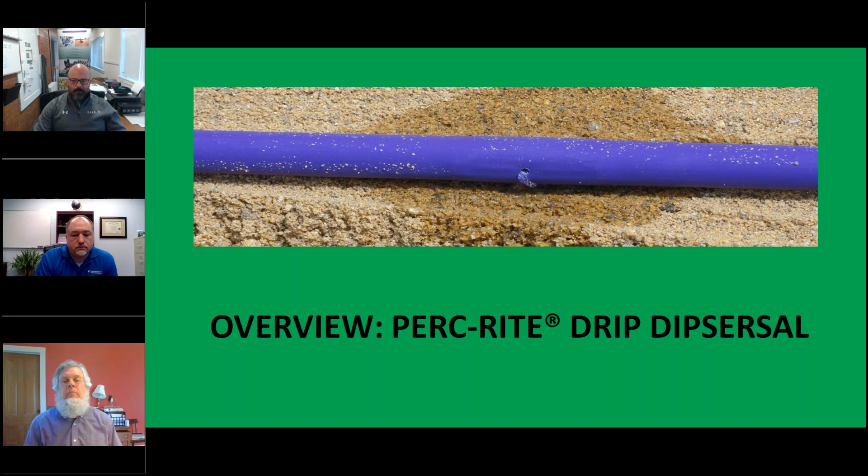So Perc-Rite is equivalent to pressure distribution under all the state codes, both large and small flows in New England. So it is a pumping system no matter what. So even if your disposal area is down gradient from your equipment, we're still pumping, okay? But need not worry, Oakson will provide sizing and actually source the pumps for you and your clients. So all the aspects we talk about today, we are providing the equipment and also the sizing for that equipment.

So what may be either the first or second most important aspect of a Perc-Rite system is the hydraulic unit. The hydraulic unit is placed in between the pumps and the disposal field. The hydraulic unit is basically final filtration. It provides a flow monitoring component. So each of these units will have a flow meter, a totalizing flow meter as part of the package.

And then lastly, we have the ability to have zones. So sometimes the zones are built into this unit. Sometimes they might be just downstream of this unit, but we break up the effluent disposal into different areas called zones. So here's some examples.

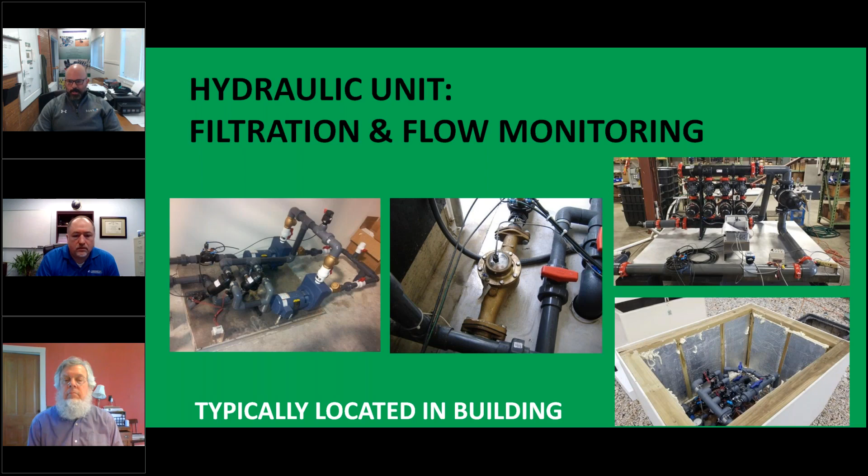So our control panel, it's a control panel, right? But we have a time dosing control panel. So when a float goes up, it doesn't mean the pump's going to necessarily go on. A float goes up and starts a timer, and we're going to dose the disposal zones on a timer basis. For these large commercial systems, it's going to be a duplex setup.

There's touchscreen displays. We have the ability to get in and out of the PLC, so we can dial in or log in through a network and see what's going on, make adjustments if necessary. Also, the ability for the panel to call out or send information out. There are data export features. So if you want to download reports on a weekly or monthly basis, that's always available for our panels.

There is a customizable aspect. So if you need different nuances or different things for them to do, our great folks at American Manufacturing can make that happen for you. They are SCADA compatible. So whether existing SCADA systems inside the treatment facility, or maybe you need something independent that we can provide to you.

And then sometimes, but not all the time, there is the ability to integrate with the treatment system, whether it be dose cutoff capabilities, killing lift stations, or even control a small scale treatment system, we can do that. So that's some of the parts of the control panel.

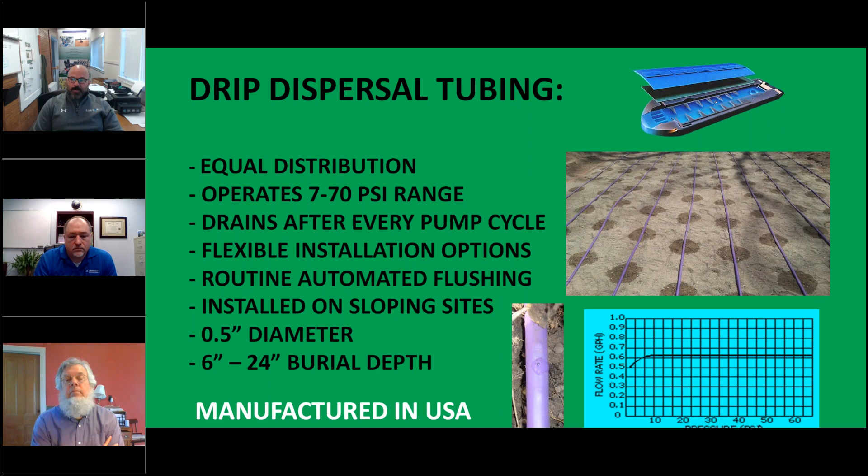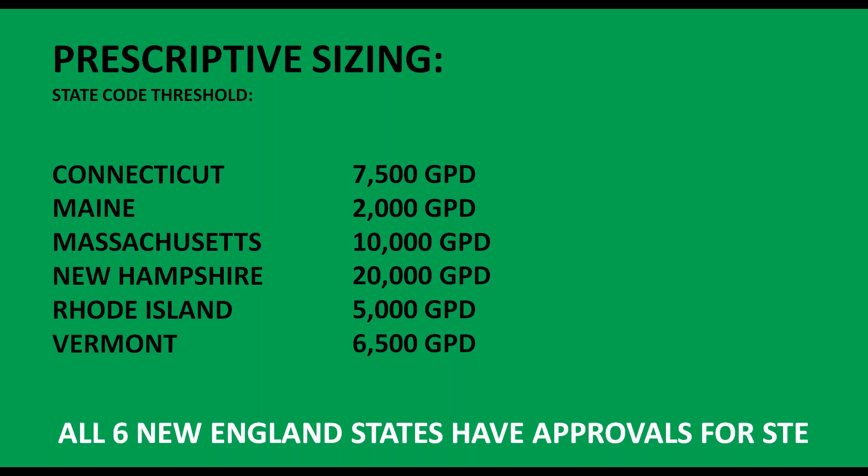But what's really important about that, all 6 New England states have given Perc-Rite drip dispersal, and Perc-Rite only of any drip dispersal technology available, approval. We're the only ones that allow primary effluent discharge through drip dispersal tubing. So we're the only one. So under this number, the state is going to give us a loading rate, but we can discharge primary effluent. Now, stating that, we're going to head into our first case study to show some of these points.

Couper Farm, Littleton, Massachusetts, a 9,900 gallon per day system. That's 100 gallons below that state threshold in Massachusetts. It is a new construction residential subdivision. The original disposal system was a stone trench system. Okay, so they started with a different idea and then transitioned. It's primary effluent discharge, no aerobic treatment at all. It was constructed in 2018.

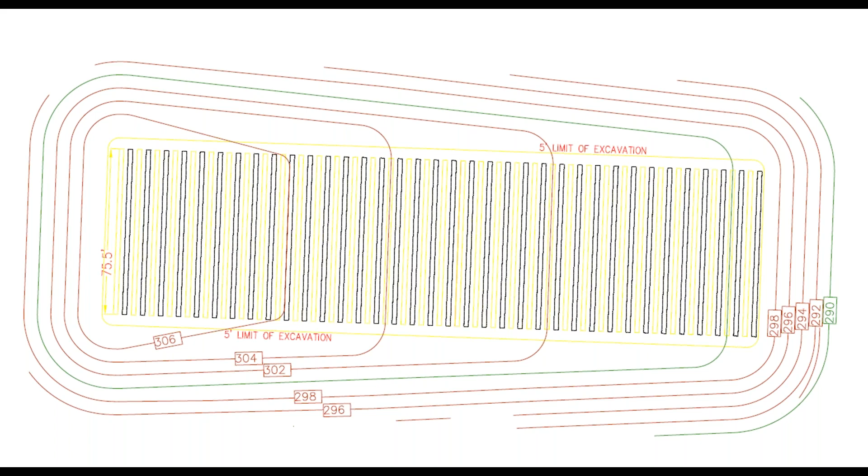So the developer looked at this and said, that's a ton of fill. You know, that's going to push back my foundations, all this grading, whatnot. We need to try something else. So the engineer came to Oakson, and we provided them a zone layout of 4 zones here that were significantly lower and had less of a footprint.

Now, these are skewed a little bit from the original trench design because we're following the contour. So the tubing runs parallel with the contour to best achieve the minimalized impact. You can see some of the grade differences. You have 306 crossing with 298, so we're 8 feet lower, not to mention a significant percentage smaller. So they decided to go with Perc-Rite drip dispersal.

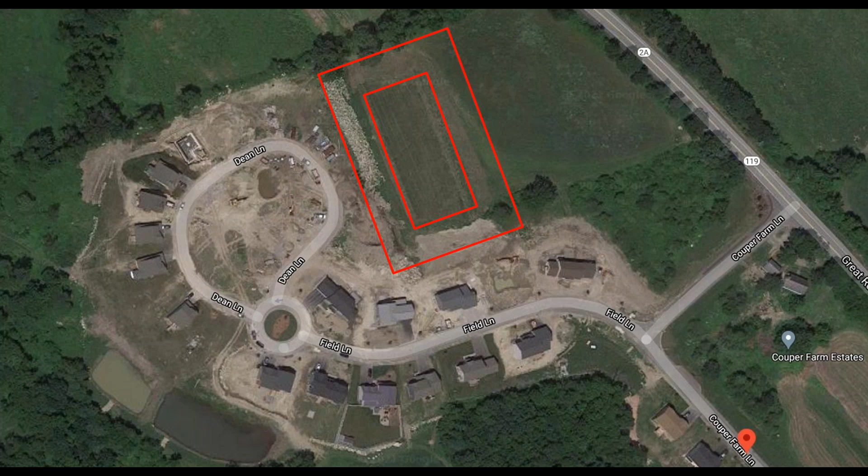So this is a Google Earth image of the site being built. The inner rectangle is the actual disposal field built. So that's the Perc-Rite system in action. The outer box would represent the sizing and area of impact if they maintained the trench system. Now, it's not 3-dimensional. It would stick up a lot higher like a mountain, but you can see the difference here.

So what were some of the advantages gained by the developer by choosing Perc-Rite? They used 8,100 less cubic yards of select sand. Originally, they needed a 5-horse, 3-phase pump to discharge. It was reduced down to a single phase 1 horsepower pump. They were able to eliminate a lift station because of Perc-Rite. Significantly less time for the installation. And our finished height was reduced by 4.5 to 8 feet over that area.

The developer provided me information stating that conservatively, he saved $175,000 in just material, not even factoring in the savings in time. And that's only for a 9,900 gallon per day system.

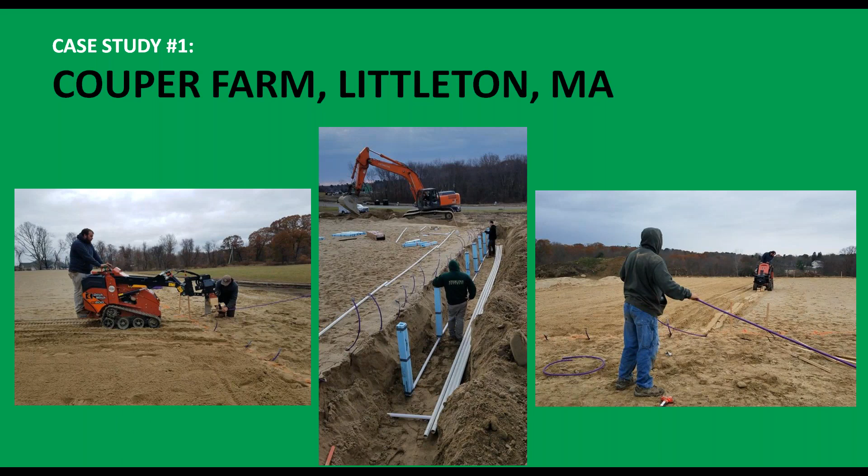So this system at only 9,900 gallons per day did not require a building, a shed, none the like. All you see is that small enclosure, one box at grade, and then a control panel. So it blends very nicely into some of these higher end residential developments.

So Perc-Rite just under the number. So meaning when you're just under that state threshold, and that typically falls in systems at 5 to 15,000 gallons per day, you can achieve the following: primary effluent discharge, so no treatment. So that would be cost savings for your client. Typically, pressure distribution is required anyway under all our state codes in the region. So you can just slide Perc-Rite right in and meet that requirement.

There is no effluent sampling for Perc-Rite. Perhaps there may be some monitoring well stuff required for your permit that's outside of the scope of Perc-Rite, but essentially no effluent sampling. There's less frequent O&M requirements, and we'll talk about that in more detail later in the presentation. All of the equipment is exterior rated, no building. Very simplified permitting process. We're under the state code and we have approvals in all states. Significant cost savings for the clients.

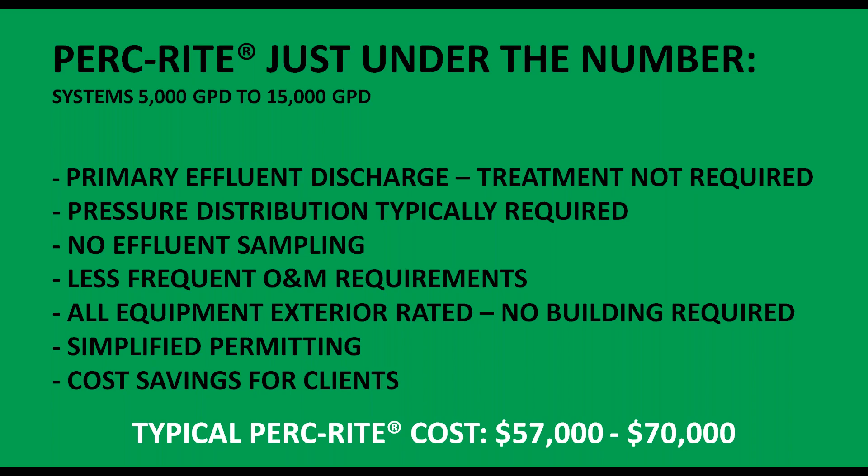Now, I haven't really done this at previous presentations, but let me put a number on this for you folks. So when we're dealing with Perc-Rite systems between 5 and 15,000 gallons per day, all of our components and our time on site is going to average between $57,000 and $70,000. That includes the pumps, the controls, the hydraulic unit, Oakson support that we'll go through later. So a very small number as compared to what you saw for the savings.

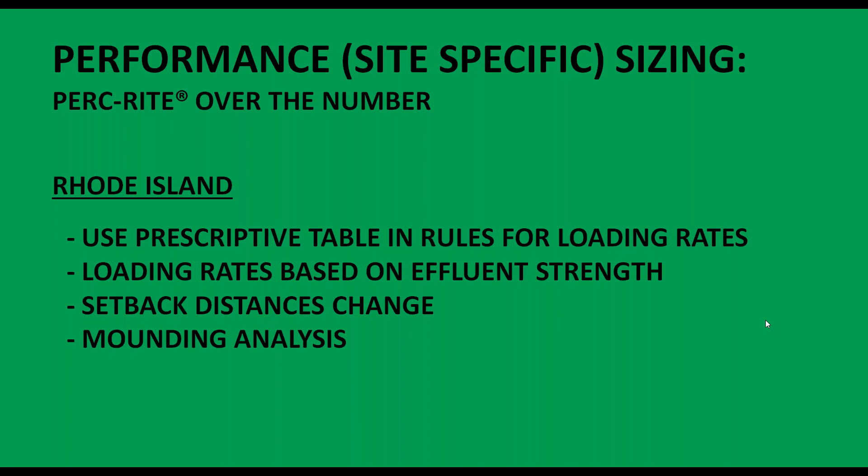In Rhode Island, you're going to use the prescriptive table for the smaller flow systems, carry it all the way up through what you need. The one difference here is that the loading rates are based on effluent strength. You also have changes in your setback distances as you increase your gallons per day. And then you'll have a mounding analysis requirement for over that threshold.

Massachusetts and Vermont have a very similar type of situation where they provide a guidance document for large system design, and they give you a loading rate based on certain types, classes of soils. So they'll make a recommendation, but that doesn't mean that you as an engineer or soil scientist, hydrogeologist, can't provide your own documentation and recommend a different loading rate. So we've seen many Perc-Rite projects in both of these states where that has been applied. And similarly, you'll need a mounding analysis, that site transmission analysis as well.

So, stating that, let's go into 2 case studies kind of wrapped into one, and we're going to transition into a different voice here for the presentation. So case study number 2, Bromley Mountain Ski Resort in Peru, Vermont. It is an 80,000 gallon per day project. It's considered a residential application, so the mountain is building additional ski housing for some of their customers.

In order to achieve this permit, we needed to provide a pilot study to show phosphorus removal, and we'll go into that detail more. All of the tubing for 80,000 gallons per day is to be plowed into existing grade. There's going to be no select fill requirement here. So imagine that. There's going to be phased in treatment. So ultimately, we need to provide tertiary treatment for this facility.

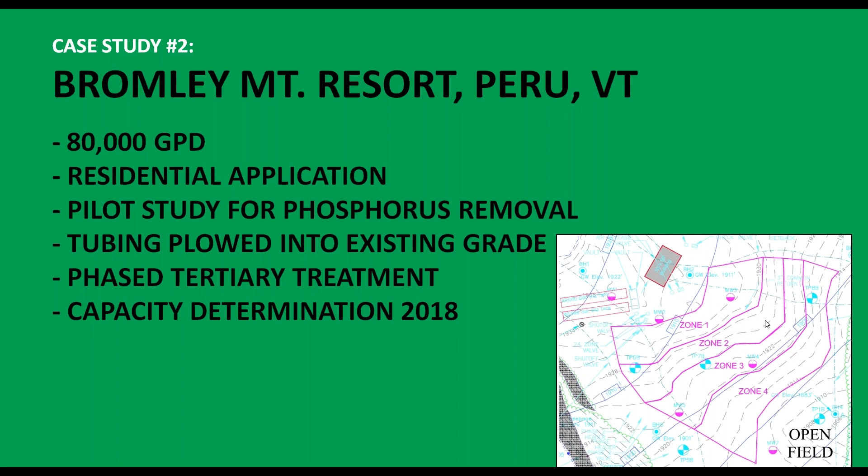The second case study we're going to be looking at during this next segment is the town of Bridgton, Maine. It's a municipal project of daily average flows of about 116,000 gallons per day. There was a hydraulic capacity loading rate determination, so the state wanted the design team to provide a recommendation for what the loading rate is, and we're going to see that whole process in detail later on. It's only a secondary effluent requirement. Construction has already commenced as far as clearing and whatnot. The Perc-Rite system is fully fabricated, ready for shipment to the site, and construction is going to begin this summer.

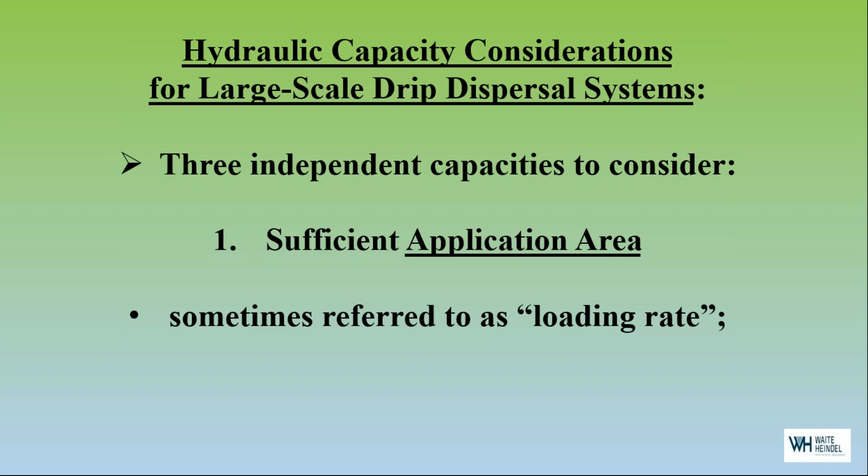The second capacity that needs consideration is the height of the induced groundwater mound. This is the mounding analysis. And the reason that's really important is that the application of wastewater to the site must not allow the water table to rise high enough so that the distribution pipes, the drip pipes, are in saturated soil. They're not going to work in saturated soil. You're not going to meet code requirements. This would be true for conventional pipe and stone systems also. So there needs to be a freeboard of some distance below the drip pipes that stays unsaturated. So that's the second capacity that needs to be determined.

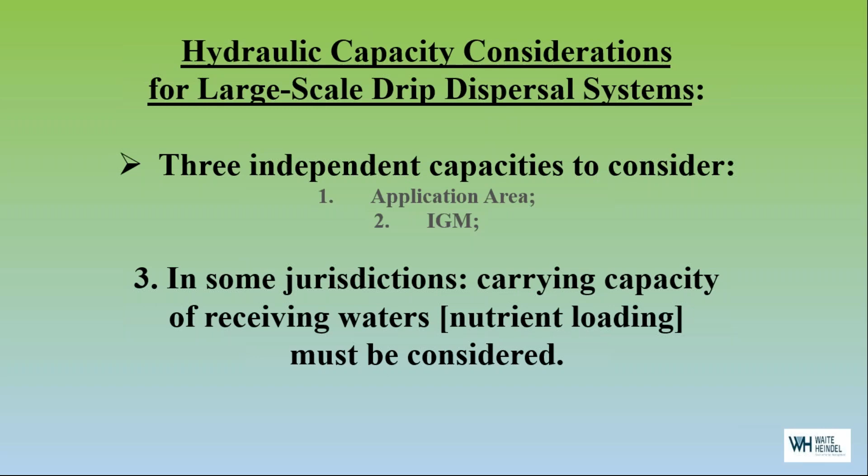And then in some jurisdictions, there's a nutrient loading question that needs to be addressed, sometimes called the carrying capacity of the receiving water. These large systems are essentially indirect discharges to surface waters. In New England, we all know that the groundwater flows towards surface water generally, and it becomes an indirect discharge to that surface water. A recent Supreme Court decision, the Maui decision, has confirmed that it's appropriate to consider groundwater discharges that may be eventually discharging to surface water as discharges. So in some jurisdictions, the nutrients that are carried by that wastewater transmission need to be addressed. Not in all, but in some.

Let's go back to the capacity number one, the application area. As Rob said, most of the application rates will be either recommended or prescribed in your code. Typical ranges are as low as 0.2 gallons per day if you have a silt loam, and at the high end of the application rates for sands and gravels, 1 gallon per day per square foot or higher. Could be 2 to 3, 4 gallons per day per square foot. There's a range there, and that's a capacity that you're going to need to figure out. And then once you know your application rate, you would apply that to determine the size needed for your design flow, or the other way around, you know the area that you have available and you back into your maximum design capacity.

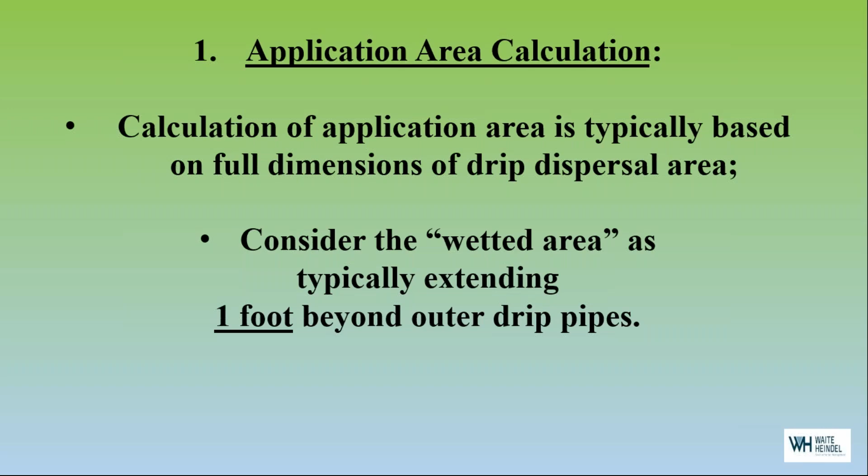The benefit of drip dispersal is that you calculate the application area over the whole tubing area. The tubes are typically spaced 2 feet apart. The wetted zone from each hole goes out about 1 foot or 2. So you just calculate the wetted area as 1 foot beyond the outer drip pipes. There's no need to exclude the between-trench areas that would be needed for a conventional calculation for a pipe in stone system. On the other hand, you don't get to include sidewall areas. Some jurisdictions allow the inclusion of sidewall area of trenches. Of course, there are no trenches here, so you don't count that. But in general, in the area that's available, you can dispose of much more wastewater by drip than by the conventional trenches in the same area, because you're using the entire square footage.

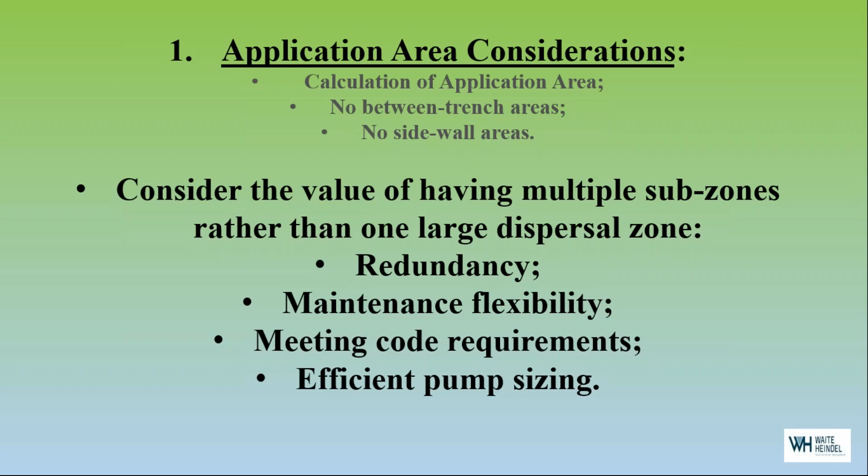And then while you're laying this out, consider the value of having multiple subzones. You saw that on Rob's slide earlier of Bromley. There are 4 zones there. Bridgton has 6 zones. Many of the larger projects are in subzones, and there's a lot of benefits to do that, and you're going to want to include that concept in your layout. You want to have some redundancy. That'll give you some maintenance flexibility. If there's a problem in one zone, the other 3 or 4 or 5 zones can carry on while the problem in that one zone is repaired. Some codes require some redundancy, and if you have multiple subzones, they each can very likely be served by smaller pumps, rather than trying to serve the entire system with one much larger pump. So it makes for a much more efficient hydraulic system. That's it on application area.

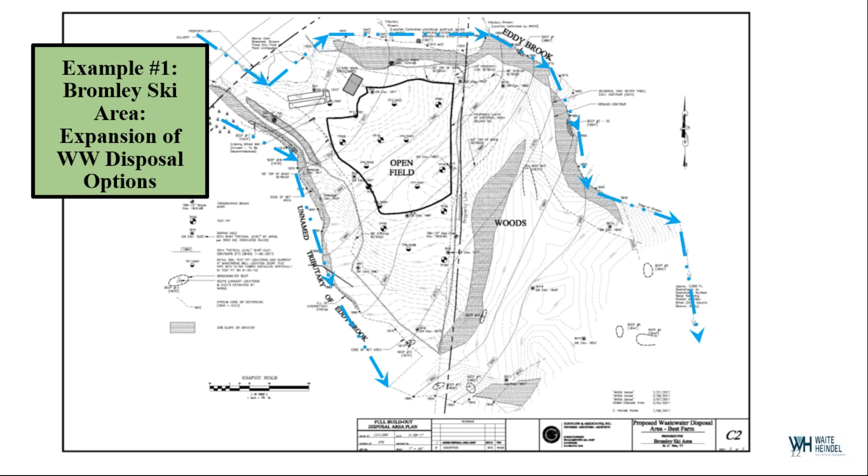This is a significant rolling topography. It slopes significantly from the upper left down to the lower right, and even in the field, it's rolling across the field. So it would be a very difficult site to lay out conventional pipes in stone. There'd be a lot of cutting. You don't want to fill. Most codes don't allow large systems on fill, so you'd be cutting only, and you'd be cutting down toward the water table, and then you'd have to find a home for all the material you cut. So this rolling terrain is really well suited for Perc-Rite, because the pipes are cut in at a typical depth, say 6 to 12 inches below ground surface, following the contours of the terrain. Here's the upper soils. You can see it's a sandy loam.

Below the bottom of the tape measure is 15 to 25 feet of unsaturated sands and gravel. So very moderate permeability, and no extra fill was needed to be brought in. We just sliced the pipes. The pipes will be sliced in at perhaps that depth, at the bottom of the A horizon, top of the B horizon, and there you go.

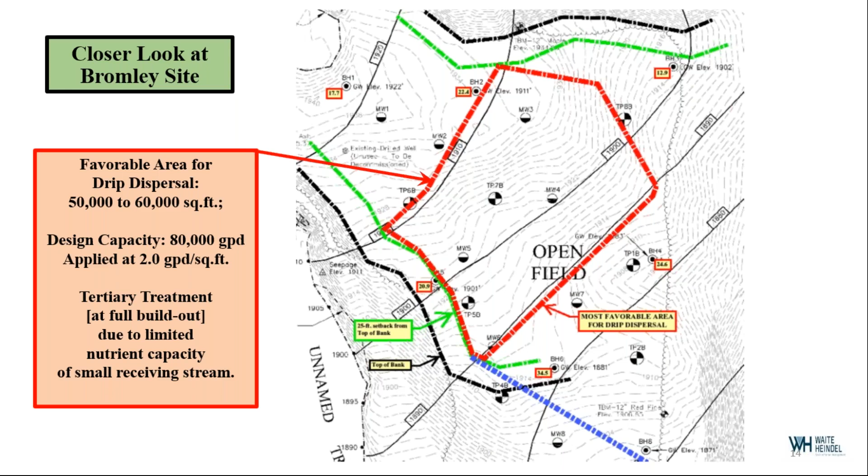So circled in red is the area that was chosen ultimately for 80,000 gallons of capacity applied at 2 gallons per day per square foot. The full build out will require tertiary treatment because of the phosphorus limitations in Vermont's rules. Phosphorus limitations on the receiving water. And in this case, we're up in the mountains, so the receiving water is a tiny little stream, so there's not much dilution, so we really have to knock down phosphorus.

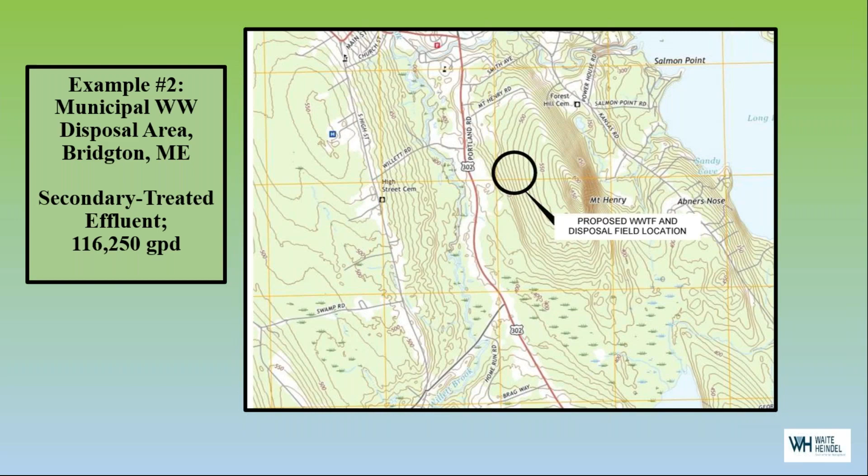The second example is in Bridgton, Maine. Here you can see the selected disposal site on the west flank of this little mountain, Mount Henry. So it slopes from right to left, from east to west down. It's glacial till. So there is not a tremendous amount of natural in-ground capacity at this site. So we're going to have to bring imported fill to meet the design demand of 116,000 gallons per day. Here you can see the faint red lines are the ground contours.

I've sort of generalized those from the even fainter black lines that are the 1 foot contour intervals from LiDAR survey. But you can see that it slopes from right downward toward the left. We're orienting the drip dispersal fields to be parallel to the contours so that we have the linear loading rate to minimize as much as possible the height of the induced groundwater mound.

We'll zoom into it a little bit further, and you can see the test pit log there. We got about 1.5 feet to seasonal high water table at that test pit, 2.5 feet to firm till. That's pretty typical on this site. So the dispersal area is 600 feet in the north-south dimension and about 150 feet wide, really 6 subzones broken up. You can see the slope is about 7%. So you do want to have a sloping site. We'll talk about that. It comes into the induced groundwater mound calculation.

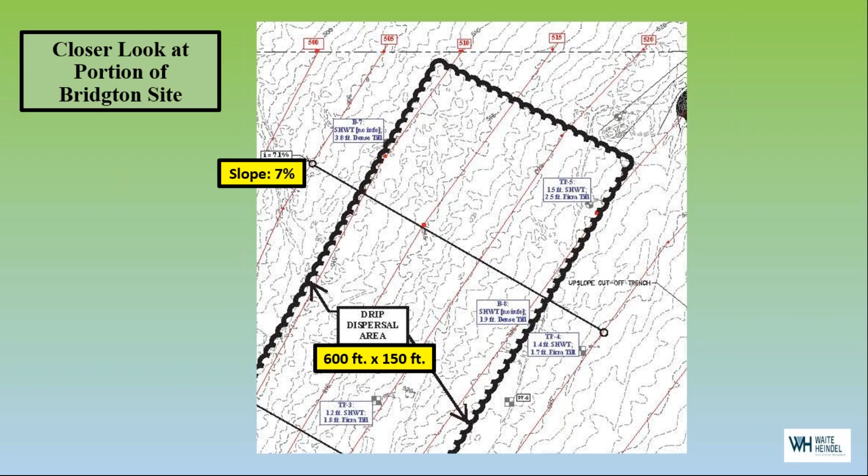So this is how the layout was laid out. It's again 600 feet in length, 150 feet wide. We've got 6 drip zones, 3 here that are 300 feet in length, 3 to the north, also 300 feet in length, and about 3 feet of imported sand is being brought in because the natural soils don't have enough capacity to handle the 116,000 gallons per day.

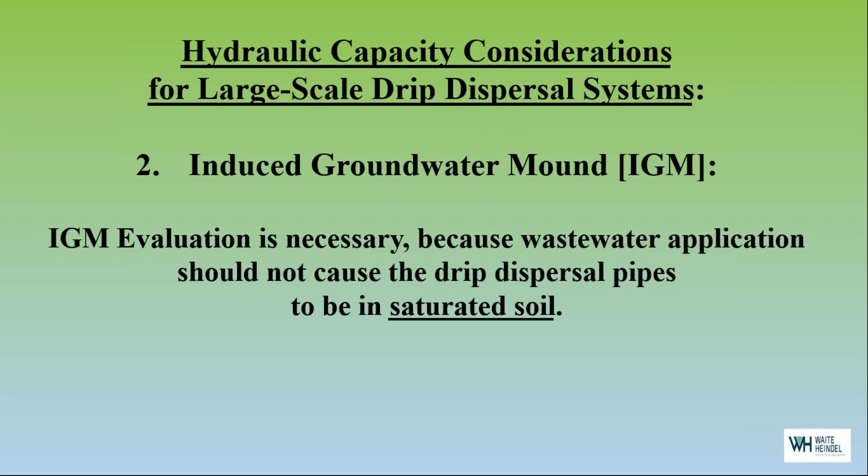So that's the application story, which leads into, as I mentioned before, this second capacity, which is the induced groundwater mound. That's because we need to document and convince ourselves that the induced groundwater mound will not cause the drip pipes to be in saturated soil. Evaluation options, you're probably familiar with them, or you've got hydrogeologists and soil scientists on your team that will work with you. Darcy's law is a pretty simple algebraic calculation.

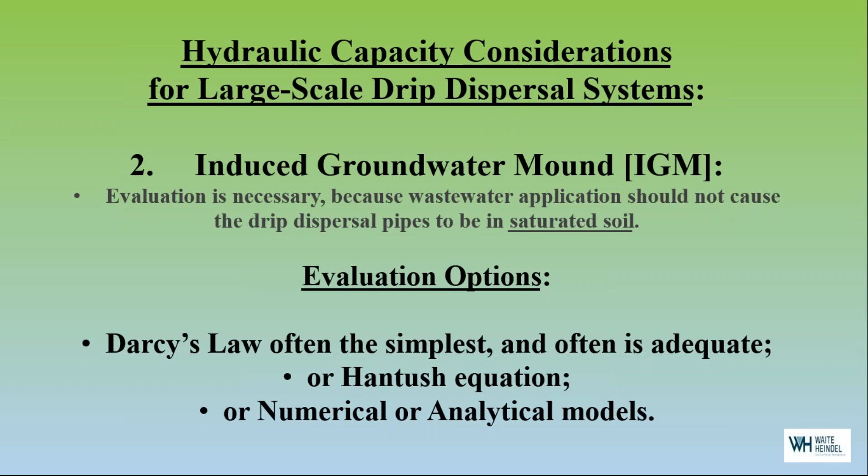It's often quite adequate, and I like to use it because it's a little bit conservative, and you want some level of conservativeness in these calculations because you don't have a lot of room for handling spikes of flows. So a little bit of conservatism is appropriate in the mounding analysis. If you want, or if the regulators ask for it, you could consider more complicated calculations like the Hantush equation or numerical or analytical models to determine the induced groundwater mound.

Let's go back to the simple Darcy's law. You're all familiar with that, Q equals KIA. And so you're going to need numbers for all but one of those parameters, and then you're going to solve for that final parameter.

And it could be that you're going to be handed a design flow, and then you're going to determine whether your site can meet that design flow. Or perhaps you're going to want to calculate the maximum capacity for induced groundwater mounding at your site. So you're going to know all of the other parameters, and you're going to solve for design flow.

You're going to need to determine a saturated hydraulic conductivity of the receiving soil or transmitting soils. You can do that from literature values. You could do that from actual field testing. Perc tests are not really appropriate, but there are small diameter hydraulic conductivity tests that can be conducted in the field. Those are going to be conservative. You could consider a larger whole soil permeability test or a pilot test, but in some way you've got to come up with a saturated hydraulic conductivity value.

Hydraulic gradient: if you're on low permeability soils like the till site in Bridgton, then the slope of the ground surface is a good proxy for the gradient. If you're on deep sands and gravels, the ground surface may have little or no relationship to the hydraulic gradient of the water table below. So you're going to want to do borings, install monitor wells, measure water levels, and then develop a groundwater contour map and use that to determine your hydraulic gradient.

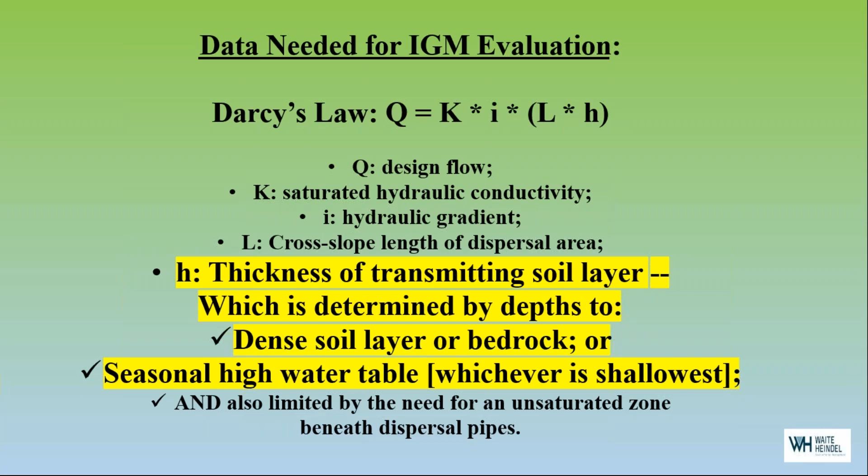The top of the transmitting zone will be whatever you choose as the depth below the dispersal pipes. That is the maximum height you'll allow the groundwater mound to rise to. And I like to put in at least a half a foot of so-called freeboard unsaturated zone in our calculations. The regs in your jurisdiction may require a greater unsaturated zone thickness, so you need to work that out with your regulators. And that's again because you need an unsaturated zone for the dispersal pipe.

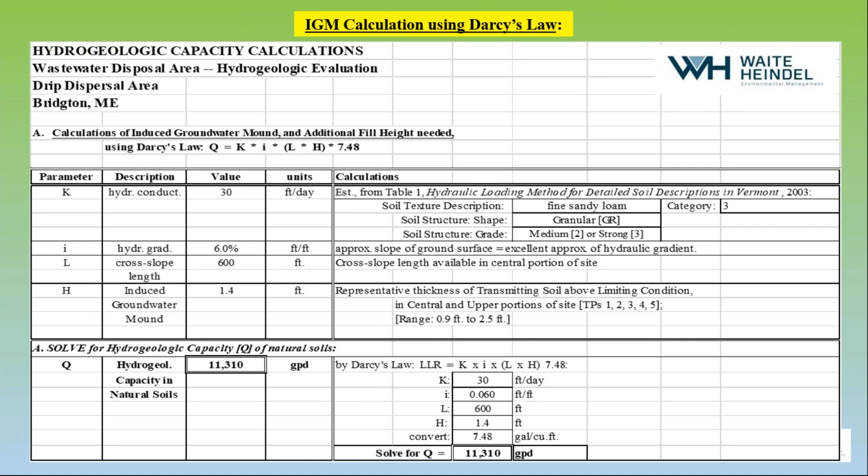So here's a pretty simple one. Darcy's law, of course, is algebraic, so it's pretty easy to do the math. This is at the Bridgton site, and I determined that the upper soils above the dense till could only have about 11,000 gallons per day capacity. That's only 10% of what we needed. So we quickly realized we've got to bring in some select fill. And they had not yet determined which fill that was going to be.

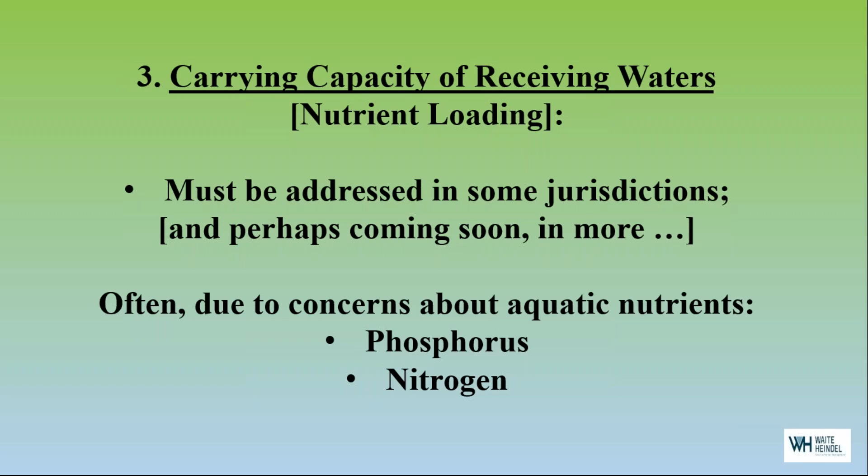And then finally, nutrient loading. Some jurisdictions may be concerned about phosphorus or nitrogen loading to the receiving water. One option to determine that, and it's the one that we used at Bromley, is to conduct a pilot test. We actually built a very small drip dispersal system in one portion of the proposed field and applied wastewater effluent to it, the goal being to document, or at least to evaluate, the degree of nutrient removal. I was pretty confident on this site we're going to get a high degree of nutrient removal, but that needed to be documented. So we constructed a little drip dispersal area.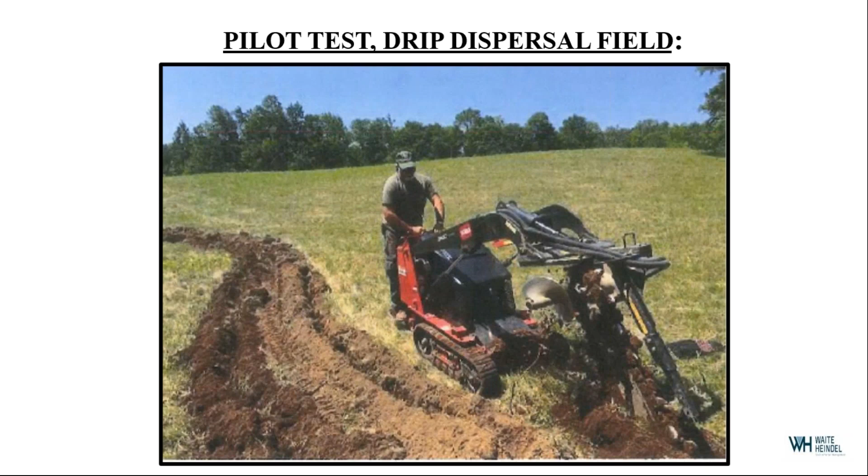There are the pipes about to be backfilled. Pretty simple system, just lay it on the ground because this is a pilot system. We had to run it for 4 months to get the equilibrium, but we avoided freezing conditions. To supply it with effluent, we just installed a little plastic lagoon. This is all the pumping system at the top of the hill.

We had daily deliveries, or every couple of days, with a tank truck that brought in secondary effluent from the already existing wastewater treatment plant. And we diluted it somewhat to do a rough mimic of tertiary treatment. Although the dilution didn't bring it all the way down to tertiary levels, it was at least conservative. And then we spiked it with bromide as a conservative tracer, so that we could watch the unfolding of the process of the drip applied wastewater finally reaching the water table.

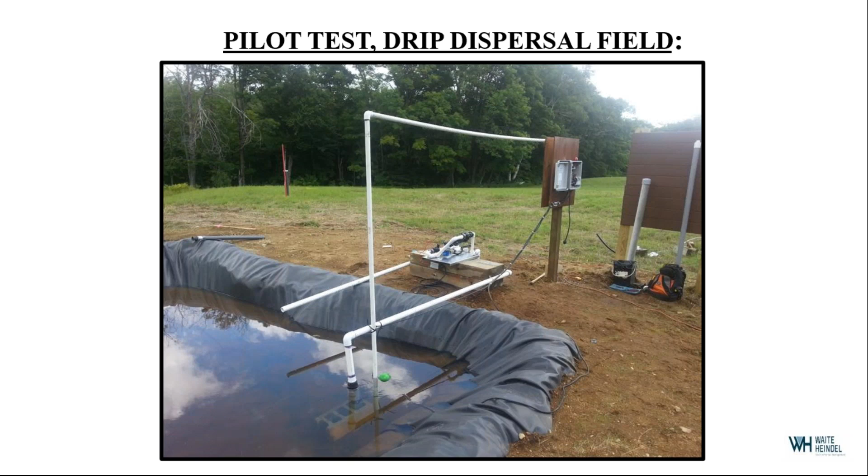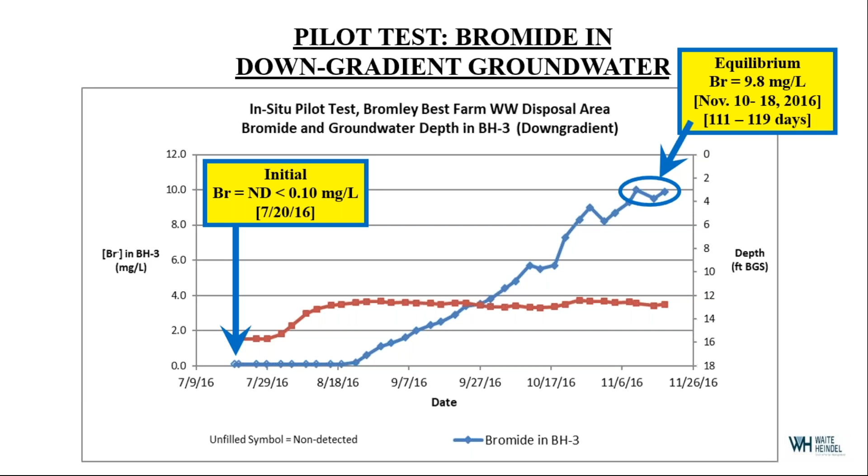We had to go another 3 months until the bromide tracer, that's in blue, finally stabilized. So you can see for the first month, we were not getting much bromide tracer at all. We knew it was eventually going to show, and there it started to show after about a month. Slowly rose, and then we had the final 10 days or so of leveling off of the bromide tracer, and that's when we then sampled the down gradient monitor well for the nutrients to see how the soils renovated the nutrients.

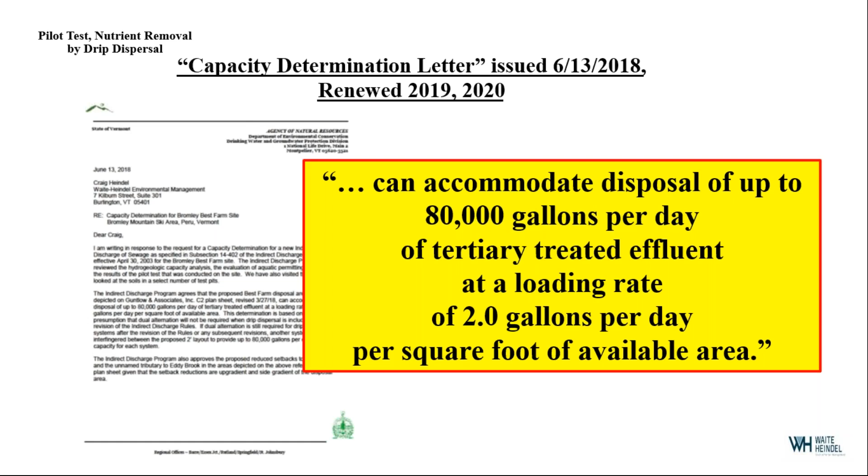That was great. And then we had essentially total adsorption of phosphorus, mineralization of phosphorus into the soils, which is not surprising. The drip pipes were way up high in the soil profile, where there's a tremendous ability of both of these nutrients to be removed or at least knocked down by different chemical and microbiological processes, but nonetheless, they're handled very well. And the state agreed and authorized 80,000 gallons a day, as you can see in this capacity determination letter. As Rob said, the site has not yet been built while the developers are searching for investors.

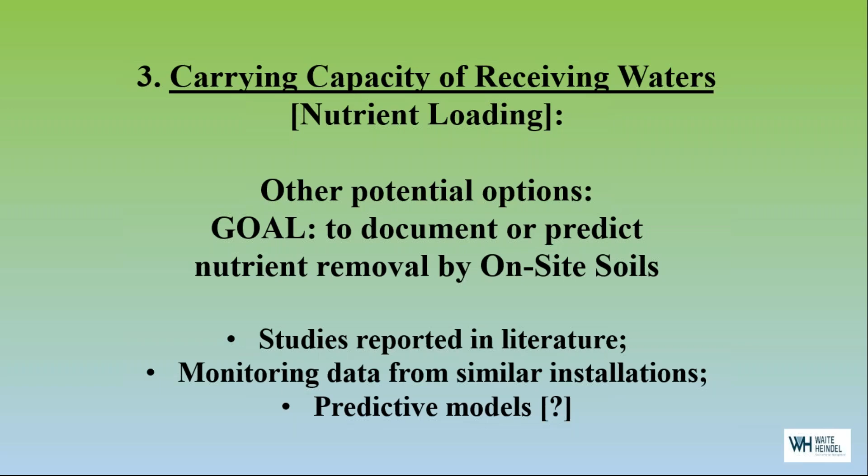So there are other options. If you have a nutrient loading evaluation, other than the pilot test, you could look for literature studies. You could perhaps find a similar site that's already constructed that has monitoring data and see if you could generalize those data to your site. You could try predictive models. I haven't seen much success in that because they're so site-specific. Soil chemistry, effluent chemistry, everything is very important in this nutrient reduction. So I'm not sure about predictive models being accepted by regulators, but there are other options, as you can see listed here.

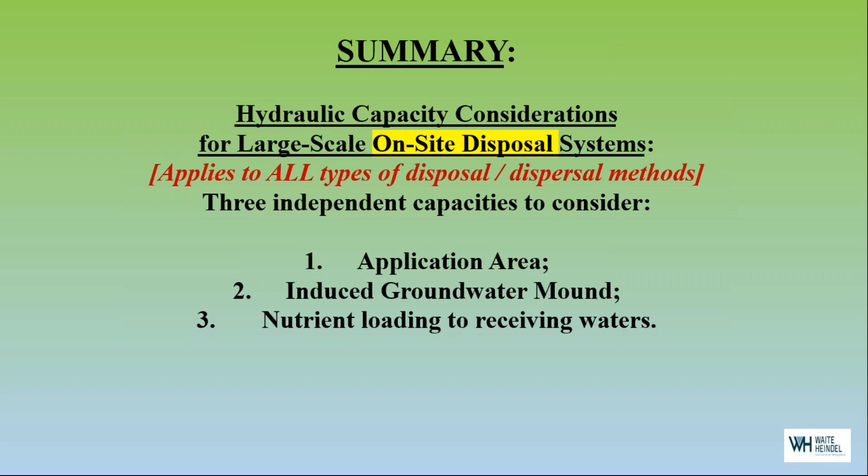So again, you're going to need to evaluate 3 separate hydraulic capacities, and you're limited by whichever of those capacities is the most limiting: application area, groundwater mound, and nutrient loading. Those capacities really apply to evaluations of all on-site disposal systems. They're not particular to drip dispersal. Just to summarize the application area, you're probably going to use either an allowable application rate or one that comes from a guidance document, and then you can calculate it on the entire wetted area of the drip field.

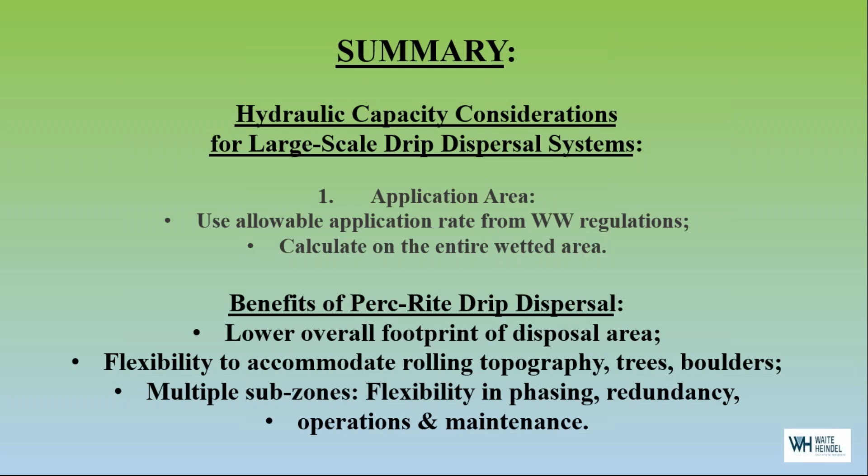So the benefits of Perc-Rite drip dispersal is that compared to pipe in trench, generally the overall footprint is significantly smaller than a conventional pipe and trench system. It's got the tremendous flexibility to accommodate rolling topography, and if you have a few prized trees or boulders, you can just avoid those with a piping system. So it's very flexible for installation, and it's got the benefit of allowing multiple zones for all of those important aspects. For the induced groundwater mound, the goal is to ensure that the drip dispersal pipes always are operating in unsaturated soil. And there's a bunch of different ways to determine the IGM.

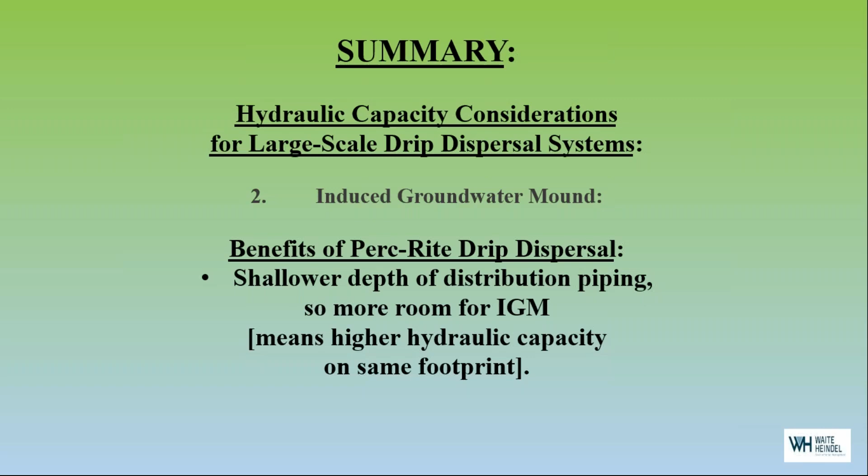The benefit of the drip system, such as Perc-Rite, is that the pipes are installed quite shallow in the soil profile or in the imported fill profile, so that you've got as much room as possible for the induced groundwater mound. And then finally, in some jurisdictions, you may need to do an evaluation of nutrient loading to the receiving waters, and options are the pilot test or other methods to document the degree of nutrient removal.

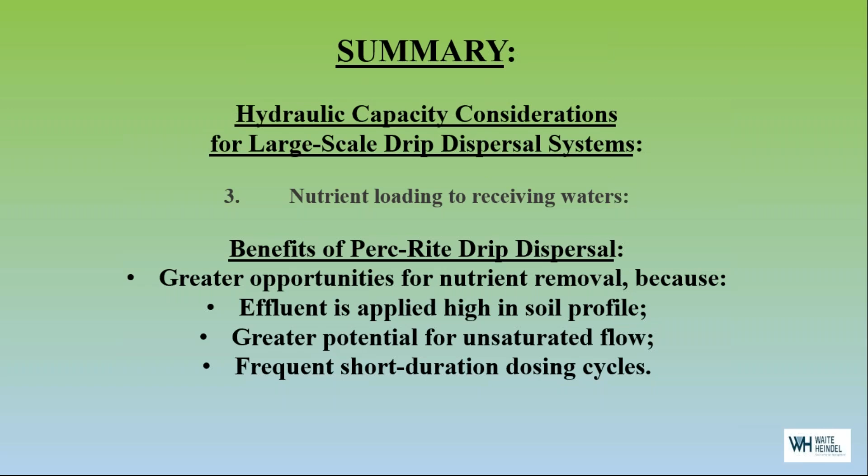And the benefit of a shallow laid Perc system is that because the effluent is applied high in the soil profile, you're going to get the greatest removal of nutrients because of the microbial activity and the higher amount of organic material, humic material, and aluminum iron coatings on the soil particles, and the frequent short duration dosing cycles, which are greatly amenable to contaminant removal.

And so I will stop there, see if any questions, and turn it back to Rob. Thank you, Craig. Thank you very much. So let me just switch back here.

Okay, moving on. So based on Craig's presentation, we talked about sizing, right? So now you as an engineer, you've done your soil analysis and your hydrogeo study, and now you have an area. It may be perfectly rectangular. It may be shaped like the state of Texas, but no worries, because you will work with Oakson to take whatever area is available to you, and we will adapt that to a functioning Perc-Rite drip dispersal zone.

Sizing the pumps in the hydraulic unit. Brian mentioned that in his presentation, that you don't have to worry about that. But the good news is, you also don't have to take our word for it. We're going to provide you a spreadsheet of friction loss calculations with all of the criteria of your project in it, and give you the math for how we got to the bottom line of a zone supply line being 2-inch, or a pump being 1.5 horse or 3 horse. And then we'll give you all that information.

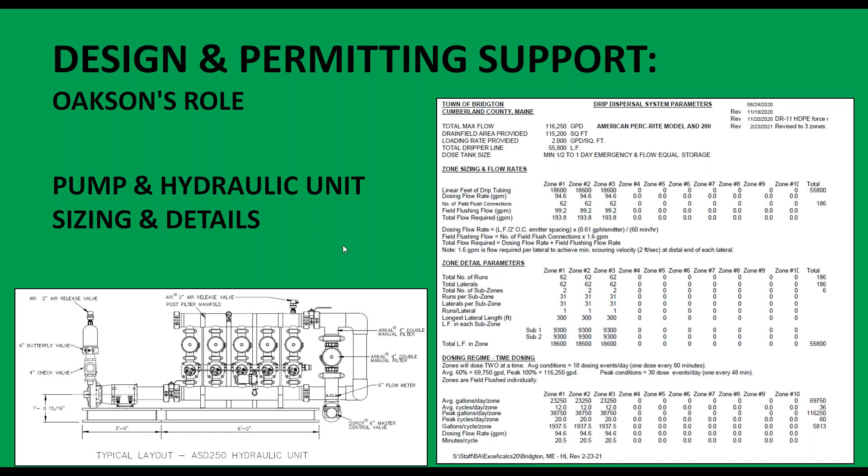Then we'll give you all of the details for that selected pump or hydraulic unit that will be in your project. There is a full suite of AutoCAD details, including all the construction notes. On the smaller scale, large flow projects, they can typically be brought in 1 or 2 sheets. On the larger scale projects, we'll break it down into more cut sheets and a different type of presentation so that you can capture all of the nuances that you need for your system.

When it comes time for submittals, we will have and provide to you every single possible cut sheet and shop drawing you need. So that hydraulic unit that comes factory tested and delivered to site, all of the individual components that make it up, you'll have cut sheets for, so you know exactly what we're getting. And then if your project does require some specification documents, we have a lot of those available now and can customize them as needed for your projects.

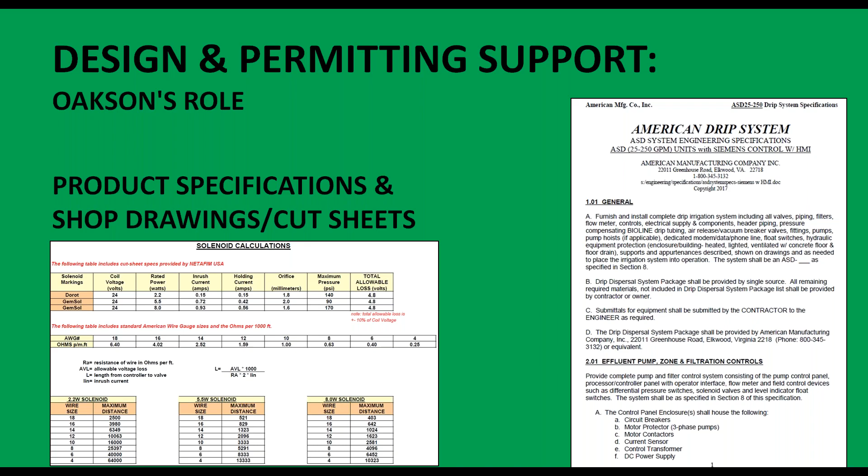Great. Let's talk about construction. Very important point here. Every single Perc-Rite system, and that even includes your 2-bedroom residential repair, which is not in our scope today, but every single Perc-Rite system distributed through Oakson in New England will include technical support, meaning we are not going to drop ship goods to the site along with that installation manual and say, have at it. We are sending our trained technical staff to assist the contractor when installing the Perc-Rite components.

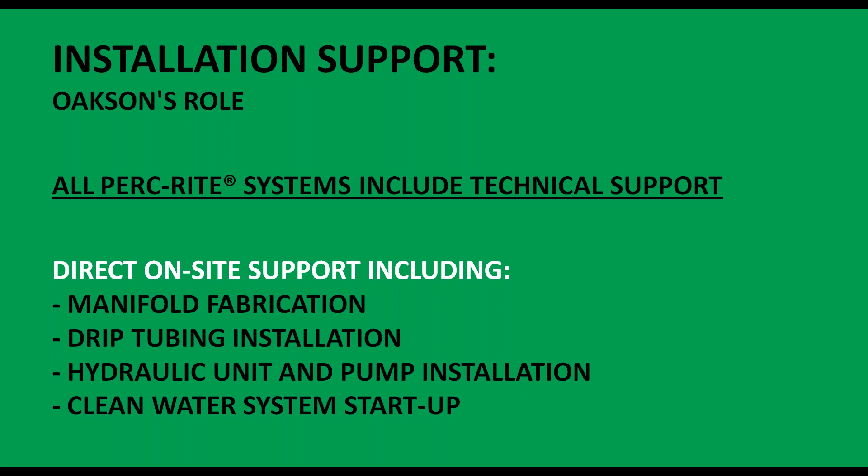The hydraulic unit comes pre-assembled, so the actual plumbing of it is not that challenging, but we want to make sure that it's done correctly. We're going to oversee that along with the pump and float installation. And then finally, when everything is complete and done, Oakson will provide a clean water system startup, for which we will provide a letter of certification to the engineer to provide to the regulatory officials and get your compliance documents complete.

So Oakson involvement with the installation is kind of broken up into different parts, and this happens over different days. So one of the first parts that we do is we deal with the underground. So all of the force mains and stuff, the contractor can run those themselves. We don't need to see trenches and hundreds of feet or thousands of feet of pipe in the ground, that's all going to be tested after installation.

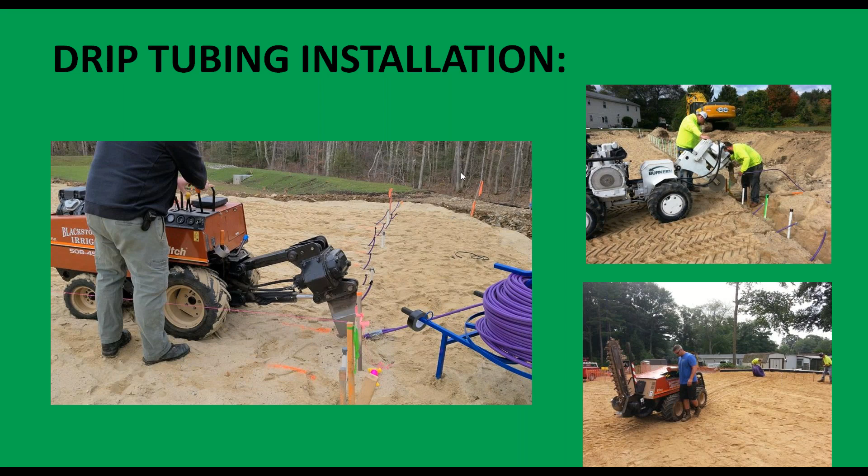So at this point of the presentation, I'm going to show a 3-minute video that has no audio, so I will be your narrator during the process and describe to you what's going on. So let me fire that up.

Having a little technical difficulty. Oh, that's unfortunate. All right, let's try again. Here we go.

All right, so this is a little bit boring, but I wanted to demonstrate to you how simple it really is. So you have the machine backing up to reattach to the coil of drip tubing. So there is a little chain link that they're just going to wrap the tubing in, duct tape it to itself, and then go from there.

What's the most time-consuming part of the drip tubing installation is actually just backing up and tying on to the next piece. Once the vibratory plow is in action, it's only a minute or so to travel across the length of the field. So in the case of Bridgton, we're going to be traveling 300 feet in one run. This tubing is going to be pulled in a lot quicker, perhaps, than if you have 40-foot long runs and have to cut it off and then back up or spin around and reattach.

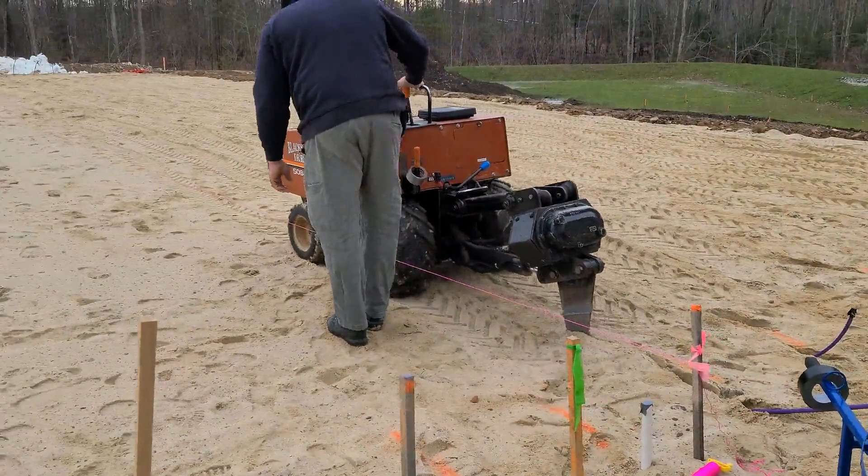So here's the plow dropping in the ground. You see a string line attached to a stake that the operator is riding along the tire. That's going to make sure that he is driving along a straight path to keep the tubing uniformly installed into the fill material.

The tubing comes off of a spindle coil, so the operator can go as fast as he wants. This is about a 125 foot long pull. And once he's attached and goes, it only takes him about 90 seconds to go across. The whole process of backing up, reattaching, and going is maybe only about 3.5 to 4 minutes per run.

We're going to transition from this perspective of the installation for this site to a drone capture video. So we got a drone last year, and it's been great to really capture the installation process. So I've sped up the video so that we don't have to be here forever. But you can see how the operator gets to the end, and he pulls it up, cuts it off, and he's going to back up.

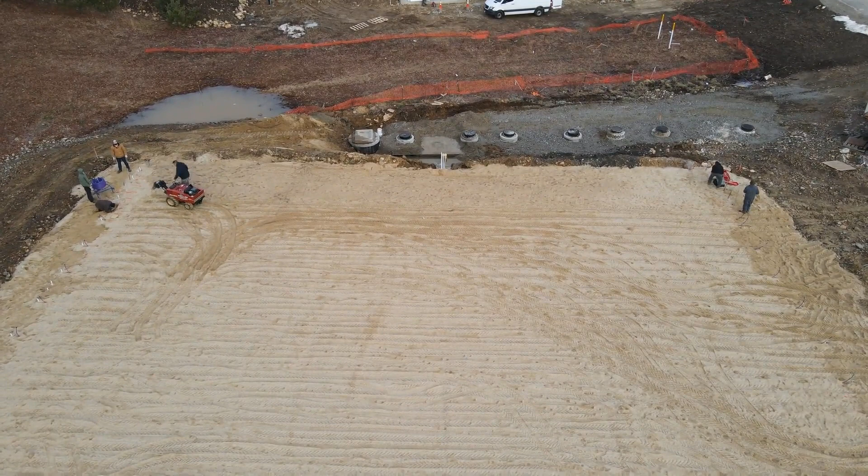So hopefully you enjoyed that. And let me head back to the presentation.

The hydraulic unit, again, they come factory tested and come to the site ready to be connected. So the example on the left is a system that does not require a building. You can see it blocked up above ground, so all the underground can be achieved at below frost depth. And then the picture on the right-hand corner is everything backfilled, ready for the startup.

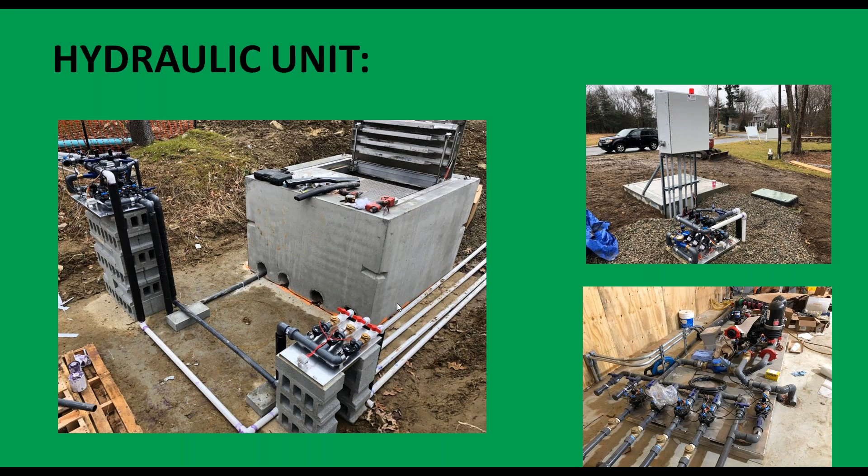The bottom right-hand corner is a system inside a treatment building that's being connected. So it's not all quite finished yet. So you see a lot of things, all in the process. But again, it comes fabricated on an aluminum skid plate, drops into the location you need, and then all of the different connections to the zones or the pumps or the return line will be established.

So heading into case study number 4. This is Prescott Point in Portsmouth, Rhode Island. The entire residential subdivision is 67,000 gallons per day. Like the example in Bromley, this tubing was plowed into the existing grade with no select fill being imported to the site. This project started in, I think, 2005 or 2006.

They built a treatment building for a direct discharge into the bay. The developer kind of lost his funding and went belly up, so the actual treatment facility was never even turned on. So we have an existing building with a direct discharge permit that could no longer be utilized because of the regulations and whatnot. The permits expired.

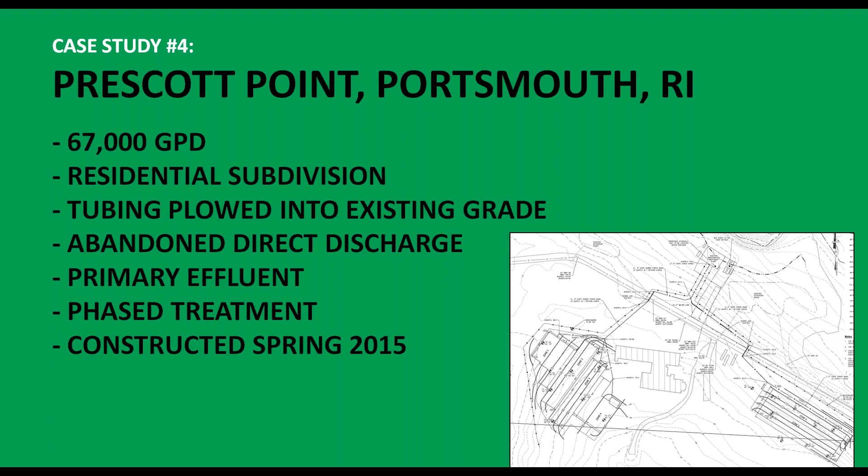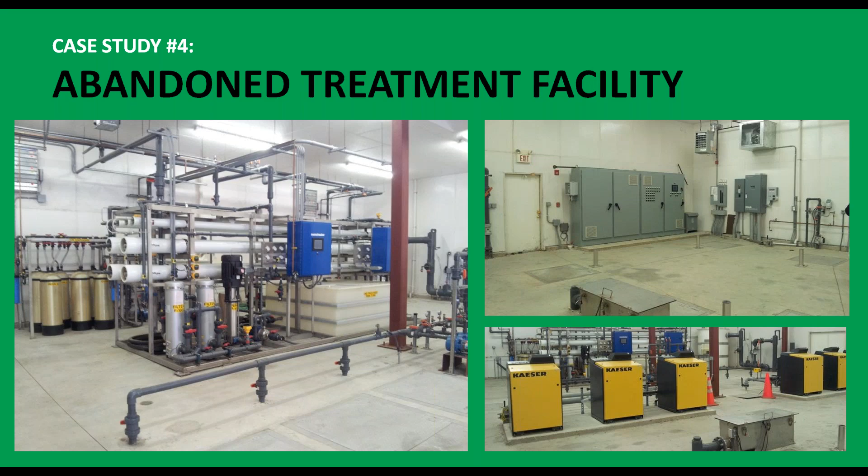Here is the abandoned treatment facility. It looks pretty good, but they cleaned up. There was some vandalism. Unfortunately, there were a lot of rodents that nested in there and ate a lot of the wiring. So a lot of the components, really, to even utilize them again, it was going to be more of an expense than just to start from scratch with a lesser level of treatment that was to be required.

Phase number 1 was up to 15,000 gallons per day. So they reconfigured the tanks in the treatment process to turn it into just a septic tank effluent system. So there was solid settling that carried over into pump stations. They built out all of the Perc-Rite components in phase 1.

So even though we were only discharging 15,000 of the 67,000, so about 20% or so, it was important to have all of that soil capacity because the prescriptive loading rates under the state code required that. Also, when they did the site transmission analysis, they backed into the nitrogen loading capacity. They were able to get 15,000 gallons per day before the nutrient loading did not meet the code requirement. During the process of phase 1, the engineering company redesigned the entire treatment train to be ready for future phases.

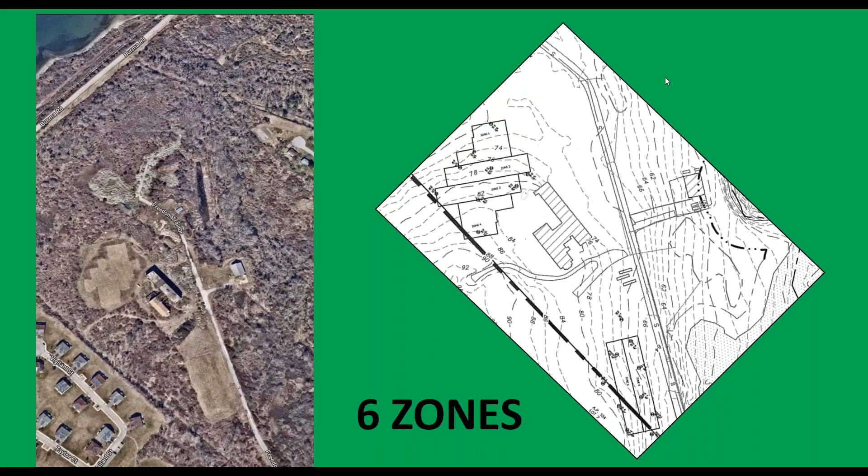So this slide's kind of interesting. This is that same slide I showed you before, but you can see the actual plan layout, how these pieces, just like a puzzle, fall right in. So it's quite exact on how the tubing was installed, even with the vibratory plow into existing conditions. So the tubing is being plowed in here.

This is the treatment building. So we utilized a corner of the building with close proximity to a hatch where the settled effluent came in, and through suction lift lines and pumps, drew it out of those holding tanks through this hydraulic unit, a force main into a series of zone valves.

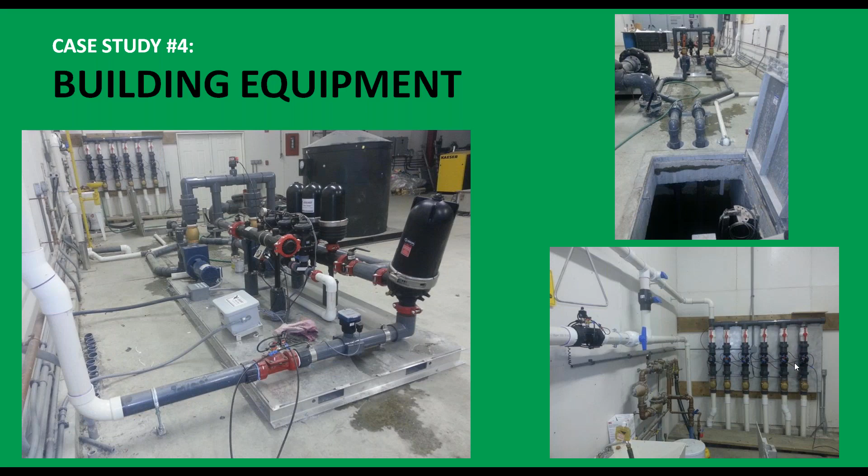So this represents all 6 of the zones. So these particular zone valves will turn on and off as needed, only dosing small areas of the entire disposal field, all done by the control panel. So all of the electrical components and all of the items that may require routine operation and maintenance, all inside the building. Very, very simple process for the operators.

So what were some of the advantages brought on by this project in the changeover to Perc-Rite Drip Dispersal? They were able to take the existing infrastructure and easily adapt it for Perc-Rite. What I kind of say is that the Perc-Rite system was very easily adaptable to the infrastructure. No select fill was required for any of these disposal fields. There were some irregular shaped zones that were needed to conform to the most suitable areas of soil available to the site. No treatment was required for phase 1, significantly less time for installation, and the developer used sales proceeds to fund the future phases.

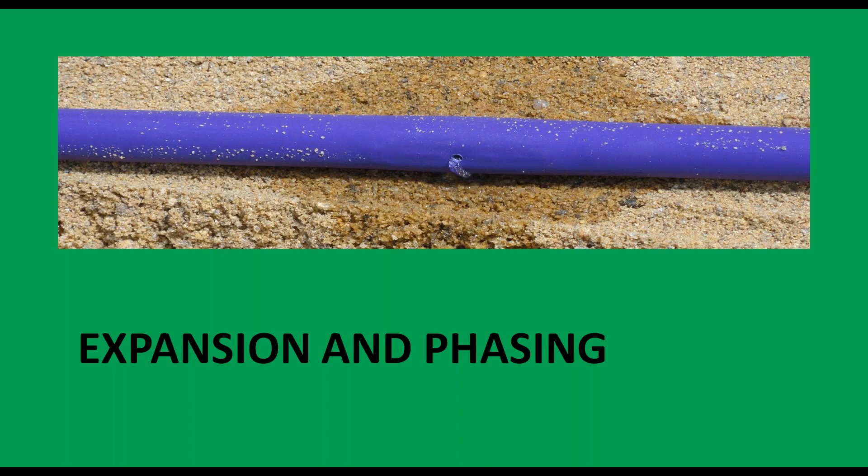So, phasing, that's a perfect segue to talk about what Perc-Rite can do to help your projects for either factoring in expansion or phasing and treatment.

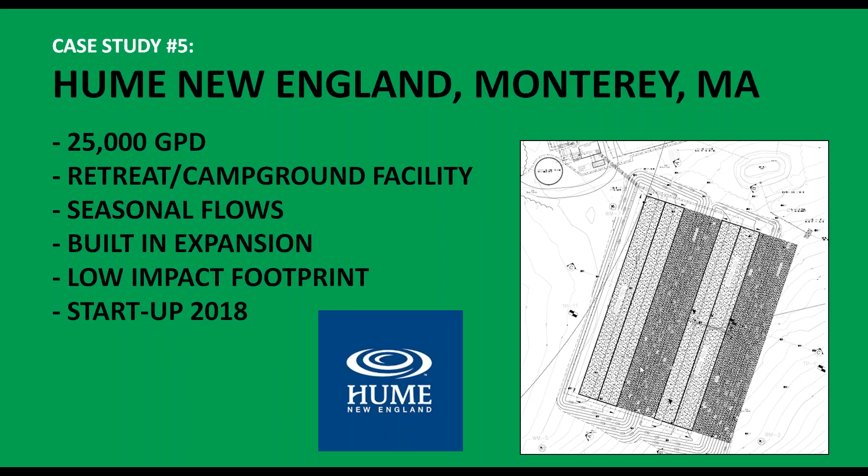Now it's a very beautiful wooded area, with lakes and nearby other amenities. And it was important from an environmental standpoint that the facility not only wanted to keep that environmental aspect viable, but it was a condition of building this system to have a very low environmental impact to the area. The system was built and started up in 2018. So let's look at this.

The groundwater discharge regulations in Massachusetts have a guidance document for loading rates. This system and the soils there were 22 to 25 minutes per inch percolation rates. And if you look at the guidance document, Perc-Rite has the smallest footprint available of any other disposal areas or any other disposal systems under the document, meaning that by choosing Perc-Rite, the engineers loaded the system at 0.75 gallons per day per square foot versus 0.2 gallons per day per square foot.

You may ask why. Well, the good folks at Mass DEP realized that because of the low application rate, because of the rotating zones, because of the run time, rest time, and the recovery that the soils are given through the benefits of Perc-Rite, that for slower perking soils, they were able to give it a more, I don't want to say aggressive loading rate, but I guess I did say aggressive loading rate.

So in this case, the inner rectangle are the 4 zones built for this system. The outer rectangle represents what the area of impact would have been if they chose any other disposal system under the guidance document. So I just kind of centered this, but you can imagine that if they didn't want to move the building or the other infrastructure, this would have slid out and all of this wooded area would have been decimated, not to mention way more fill to achieve the separation required.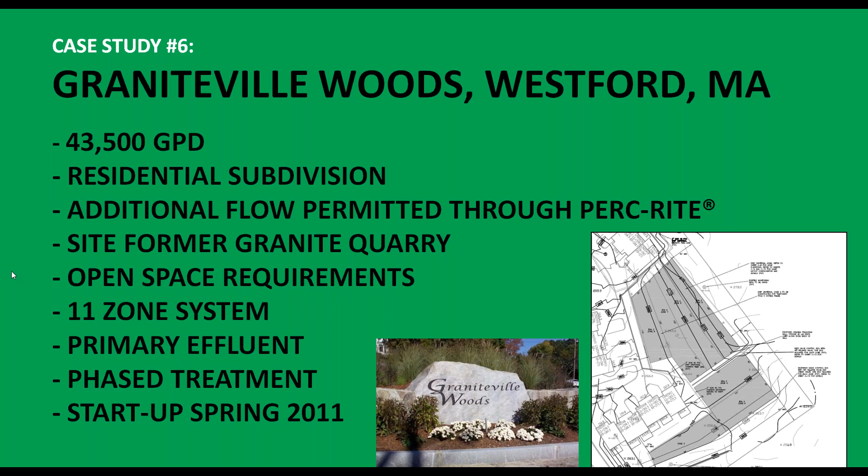11 randomly placed, all different size and configured zones placed throughout the site. It started as a primary effluent discharge system. Like other examples we've talked about, treatment was phased in, and it was built and started up about 10 years ago. So what were some of the site constraints here? 140 acres of mostly bedrock, okay? A lot of blasting here. Open space was a requirement for permitting. You had a perched water table at about 3 feet.

In order for the developer to make money on this project, he needed 20,000 gallons of permittable flow to be viable. So that was kind of like his break-even point, or the point at which it made sense for him and his funding for that matter. All of the other, and I'll use my quotation fingers here, conventional leaching options that were looked at fell short of that 20,000 gallon per day number needed.

So this is, again, thank you, Google, for this image. And this is the entryway of the subdivision. So a lot of the open space is at the front end, just to make it welcoming. You can see a pond here. The treatment building is here. And then this is a series of zones here, series of zones here. So a lot of the backyards of these housing units are open space designated for disposal.

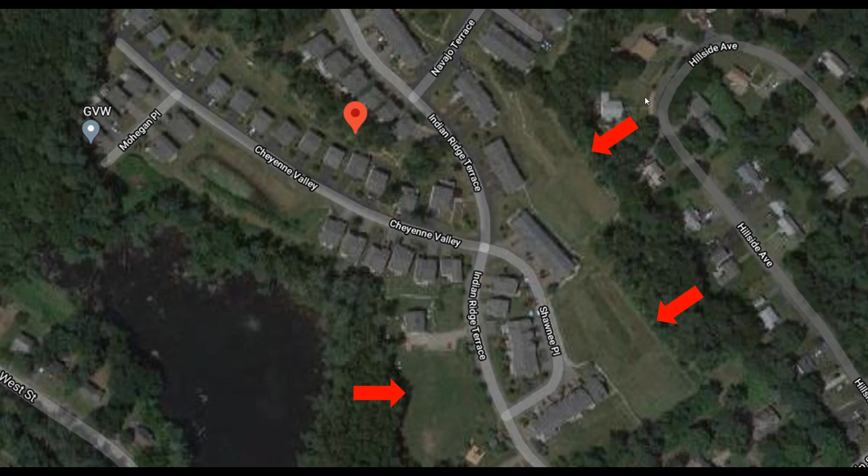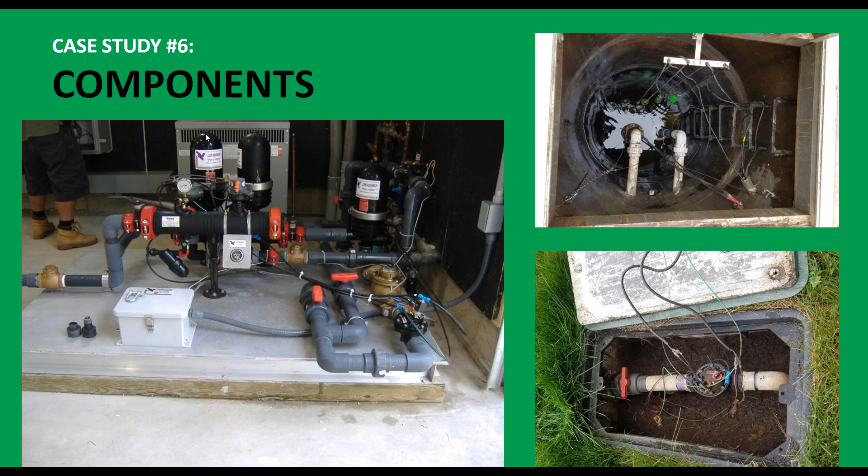The hydraulic unit located inside the treatment building, submersible pumps. These are somewhat larger. These are 5 horsepower pumps because there is a lift and distance component to this site. And then the zone valves were placed at the beginning of each zone manifold. So these are actually run in the ground and open and close at that point because the zones were really all over the place. This was a better way for construction.

So in summary, what were some of the benefits of choosing Perc-Rite for this case study? They got 43,500 gallons per day of flow, where they couldn't even get 20 for any other options that were evaluated. So more than double of that minimum amount to make it viable. So let's just say the developer was very, very pleased with what they're able to achieve on this site.

We discharge primary effluent up to that state threshold of 10,000 gallons per day. The first units that were constructed and occupied under this primary effluent discharge were sold, and the proceeds were used to fund $1.5 million in just treatment components, not just the building, but the actual membrane treatment system.

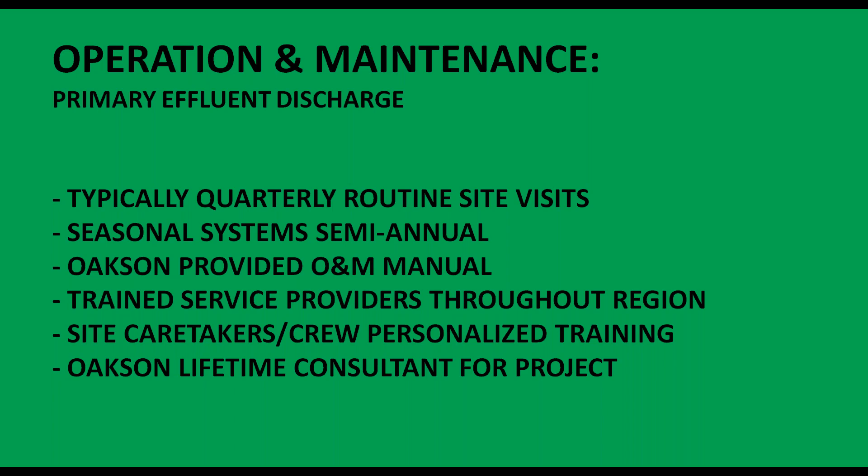But in some jurisdictions, the caretaker for a camp or a site or the maintenance crew for a building can be eligible to maintain the Perc-Rite system. Oakson is more than happy to train them, give them personalized training, and then follow up with them as needed as a lifetime consultant to make sure that as new staff come on, everybody's up to speed. So we're maintaining kind of a lifetime relationship in this case.

For larger systems where treatment facilities are a part of it, we look at it as a partnership. So 99 times out of 100, the facility operator who's maintaining that membrane bioreactor is going to maintain the Perc-Rite system. We'll give them customized training. We'll provide a customized O&M plan to fit within your permit requirements. Again, that O&M manual is a component, and most of the time here it's very customized for this particular size project.

We will follow up on a yearly basis for typically the first 3 years of operation to make sure that the staff has absorbed all of this training and is confident with what is going on. Or again, new staff come in all the time. We're going to get everybody up to speed. And again, we maintain that lifetime consultant point of view for all of our projects.

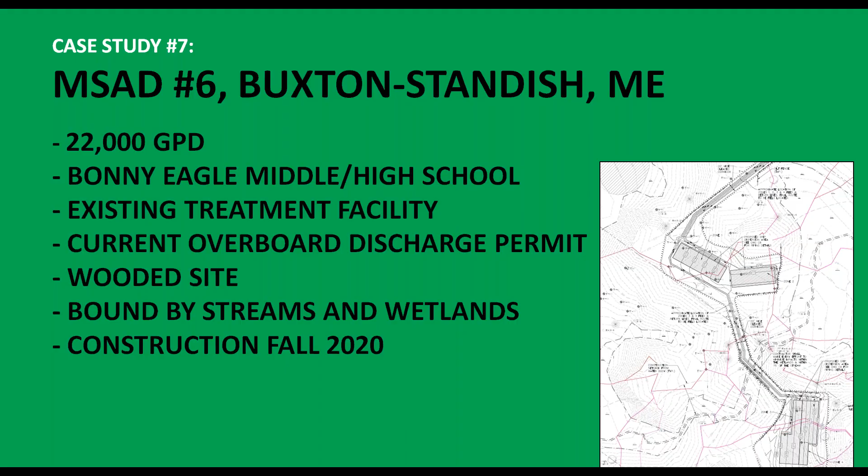It's a very wooded site bound by streams and wetlands and native species of bats and other things that are very important to the ecological aspect of the area. Construction began this past fall, and we're pulling the tubing in, I believe, April 9th. So that's coming up real soon. What I wanted to share with you is a couple of drone captured pictures.

I'm not going to call out who the engineer is, but I wanted to give you, in that person's words, some of the evaluation process on why Perc-Rite was chosen here.

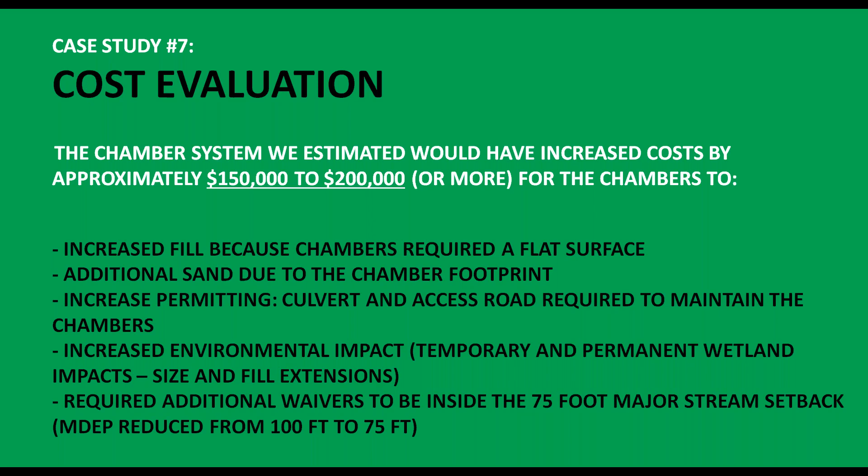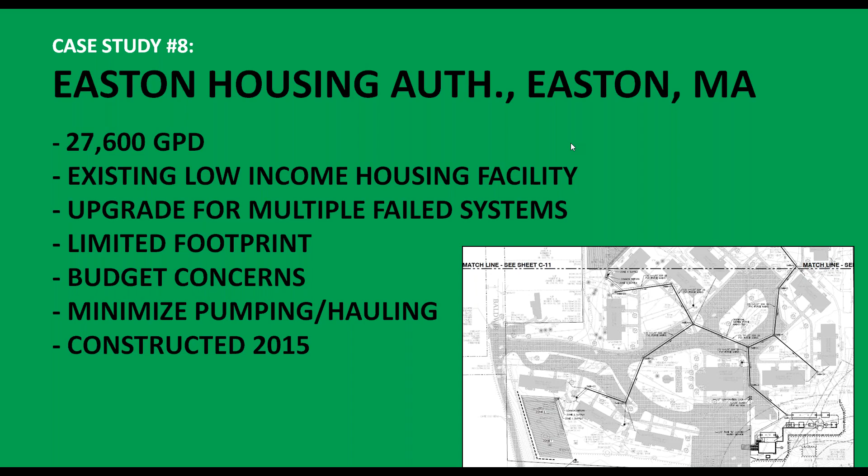Second example, the Easton Housing Authority in Easton, Massachusetts, 27,600 gallons per day. This is an existing low-income housing facility subsidized by the state and the city. Multiple failed systems, on-site systems that need to be repaired. Very limited, already built-out footprint. Budget concerns was number one here, obviously because it's a subsidized community. They wanted to minimize the pumping and hauling of the waste during the construction because that's a cost that's impossible to recoup. It was built about 6 years ago.

So here are the areas of the drip dispersal fields, and they were also the areas of the failed system. So we had to replace in kind in the same footprint as was available. All of this other area is unavailable. This is not part of the facility. None of this was part of the facility. Even this area was owned by someone else and they didn't want to sell it to the facility. They had a small nook here that they built a treatment facility, and here's all your tankage. So all in this area.

So what was decided was they used the roads to reestablish a new collection system to bring all of the waste down to this one point here. Then one by one, first they built the Perc-Rite components inside the building, connected to the force mains, and then aggressively took areas offline. Now this flow is being diverted to holding tanks, and then the drip zones were built and then put on commission. All future flow that was diverted were able to pick up the zones that were built in place.

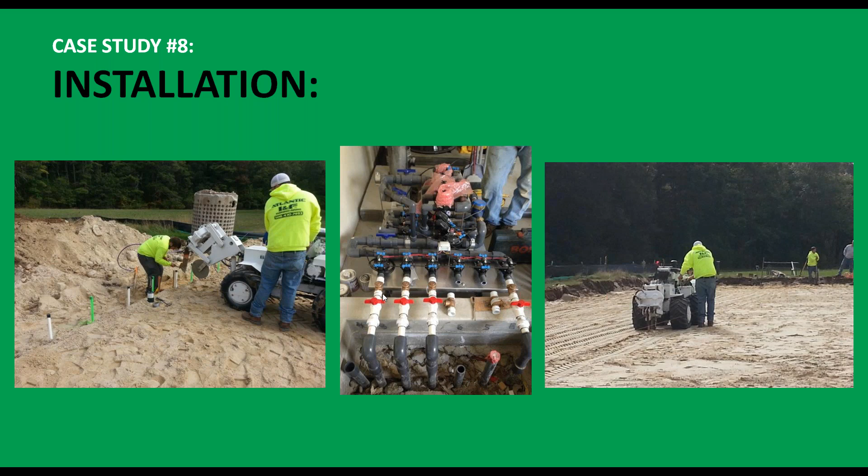You can imagine, so it was just kind of bouncing around a little bit, but because of the unique nature of Perc-Rite and the ability to zone and turn zones on and off, that was achieved. So here are the zones being built, and it's all in sand fill because all of the failed systems were removed. And here is the 6-zone hydraulic unit being plumbed in the treatment building.

Madison Place, Southborough, Massachusetts. New construction, high-end residential apartment complex, and it happens to be the exact same number, 27,600 gallons per day. This rendering that you might see in some of our material is actual rendering from the Madison Place complex. It originally started as a chamber system. There's significant slope here that it's hard to see by the rendering. The main achievement here was they eliminated an 18-foot high retaining wall that would have run about 250 feet.

So you structural engineers out there, imagine the steel support and tiebacks required to engineer and build an 18-foot high retaining wall. It was constructed in 2013. Thank you, Google, for this image showing the constructed drip dispersal area. The complex is built on a very busy road in the technology belt of Massachusetts. So this east-west road is very well traveled, and these apartment units are 100% occupied since day one.

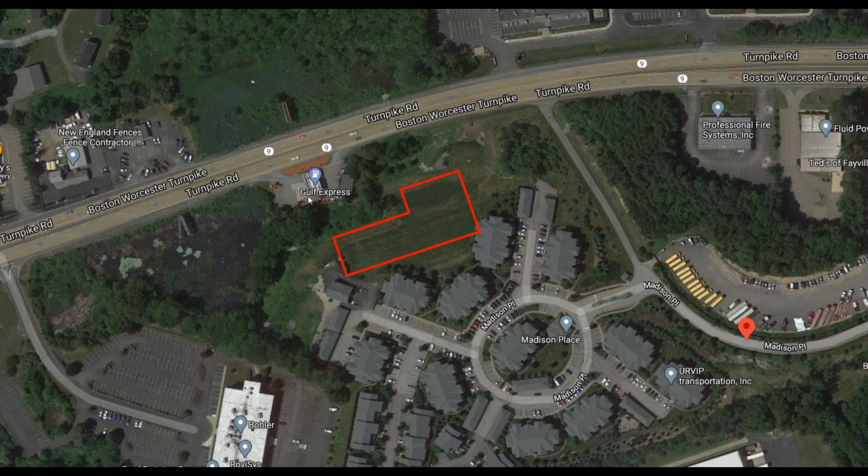There's a retention pond here, another resource area here. So you can imagine what an 18-foot high retaining wall would look like. Even, you have an existing gas station here along the road.

The developer who I called recently, who ultimately sold the development, wanted to thank me and said, Rob, you can call me anytime. Because of Perc-Rite, I saved $325,000 in wall engineering, construction, and fill material, but also because of the tiebacks of the wall, I would have lost 7,000 gallons per day of flow and would have lost the ability to construct another apartment and a half. So he said anytime that I want to call him, he's happy to take my call.

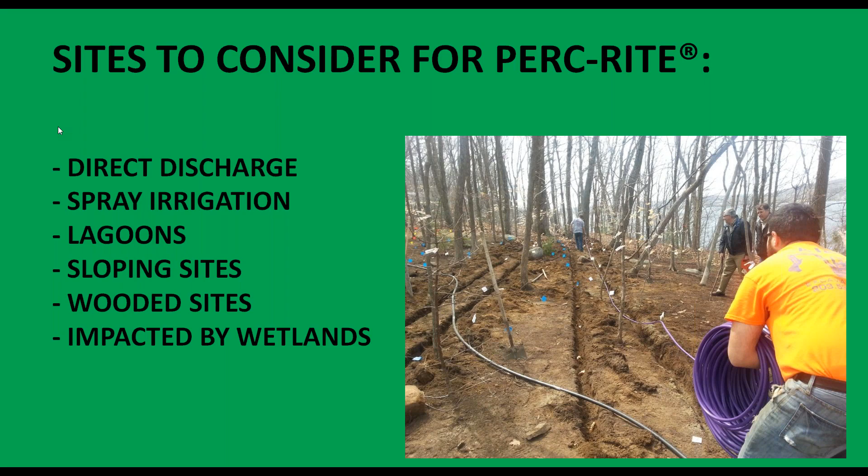If you have lagoons that you need to get rid of and discharge into the disposal area, Perc-Rite's a good choice. Sloping sites, wooded sites, sites impacted by wetlands or environmentally sensitive sites, all examples of why you may choose Perc-Rite Drip Dispersal. If you have to repair or upgrade an existing community system that's failed and maximize your footprint, Perc-Rite is a great way to bring into the fold to minimize any disturbances to the residents.

If you have a rest stop or a gas station that you need to kind of pump up into an adjacent wooded area or an open space rest area, Perc-Rite would be a good choice. Campgrounds, golf courses, schools, municipalities. There really isn't any place you wouldn't want to have Perc-Rite drip dispersal, but these are some of the examples of what Oakson has worked on over the last 15 years.

And here is an existing golf course on Nantucket that was built about 12 years ago, that is just under that threshold, has a full restaurant, grease traps, and nonetheless, it's thriving. I have a video on this one if you'd like to learn more about it on our website.

So earlier I asked you, why consider Perc-Rite drip dispersal for large flow projects? I'm gonna now turn it around and say, we ask you to please consider Perc-Rite drip dispersal projects for the following reasons. It's widely accepted at the state level. There's really no regulatory hurdles. All of the state agencies are very, very familiar with Perc-Rite and Oakson and in some respects, American manufacturing.

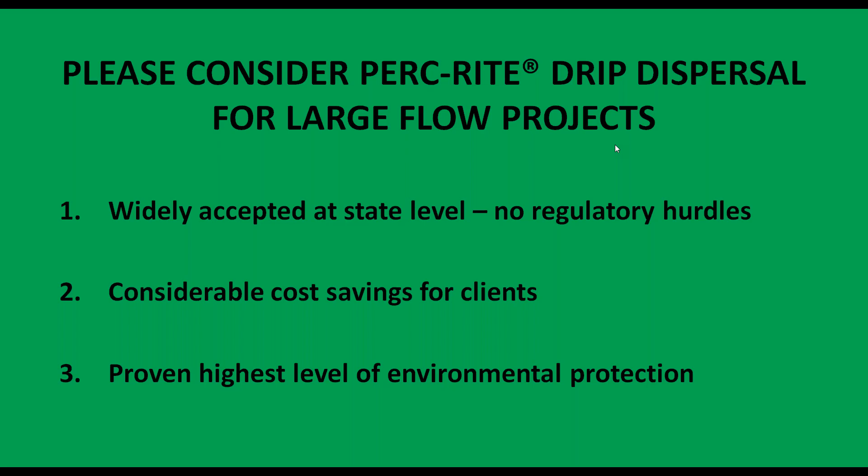There is a considerable cost savings that we showed you throughout this presentation. And earlier we discussed, and then Craig very well described, the environmental protection and nutrient removal aspect with Perc-Rite drip dispersal, small micro doses, oxygen-rich soil, etc.